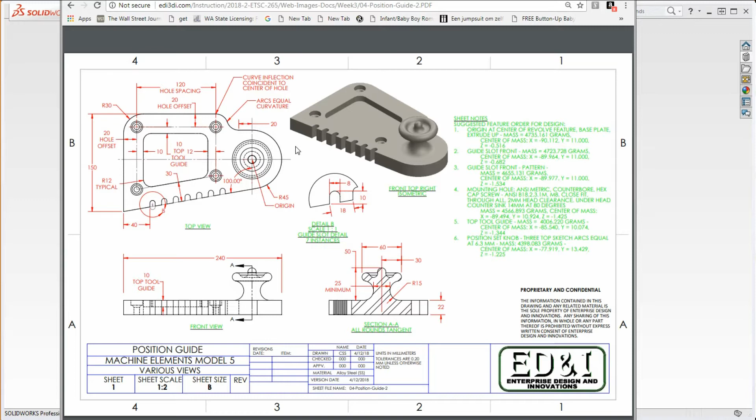The first thing you're going to do is you're going to start at that centerline, sketch an arc around here until almost to that one, not at that one, but almost to it. And you're going to stop over here and make a tangent relationship to this line, which is going to go down here at 100 degrees, and so on and so forth. So you just begin to build the model out. As we demonstrated in class too, here's going to be some other elements we're going to put in here too.

If we take a look at this view over here a little bit closer, what we want to do is we want to add some bolt hole locations in here. And the bolt hole locations are going to be off this trapezoid in here, this four-sided trapezoid, and it's going to be defined a little bit off the model too, and off of some of the sketch geometry in here too. So it also defines the sketch geometry in order to make this finish, and we'll cover that here in just a minute.

But you need to make sure, and probably the biggest thing here is this corner of that trapezoid, where that hole is going to be, is not concentric with that arc. So let's take a look at it from this direction. After we go over here with this arc, we're going to go horizontal for 20 millimeters. And we have two arcs in here that are going to be equal to each other. And then the end point of this arc is going to be coincident with this line, but the center of that arc is not going to be at the end point of that line.

So that's a mistake that some people were making in class, and I'll demonstrate this here in a bit, that you don't get a coincident relationship in there, as you probably should, and I'm going to show you how to avoid that trap and what to look for too, because a lot of people got this wrong initially, kind of bogged down in class by it. Let me show you a way to get around that, and your model works.

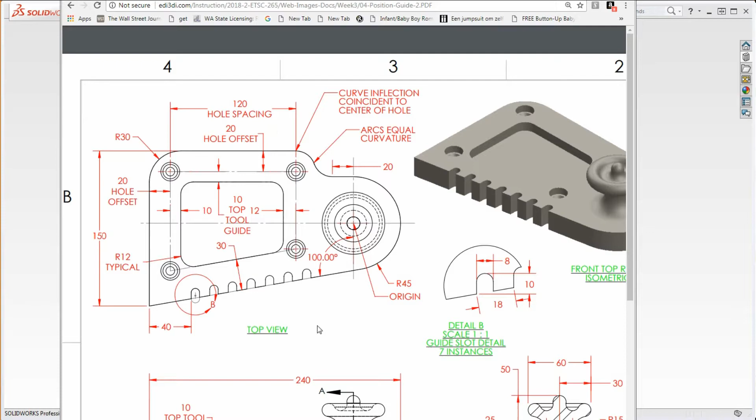For instance, Lathan's model, I changed that, got rid of this arc up here, reestablished that arc after moving some of these items around, and put back in the dimensions and that arc, and everything worked out just fine. So that's how you solve that. So that's what we're doing here. So that's going to be our first view. That's going to be our, you might say, our base feature.

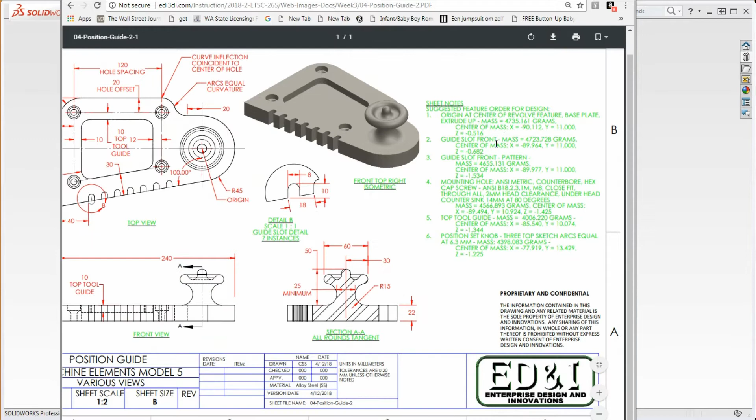Remember, the base feature is in here to ensure that we have something to put all these other features into. So the base feature is going to be this shape that we see here on the top view. We're going to go ahead and put in those slots. So as we go through here with our sheet notes, we want to start with that base feature, of course, as we've been talking about.

But you also want to put in the guide slot here in the front. We're going to do that first, and we're going to do the guide slot with the pattern after that. So we're going to do that outside of the base feature. We're not going to put that into the base feature sketch. We're going to keep that out and define that a little bit later.

So after that, we're going to put in our mounting holes. So our mounting holes are going to be these four holes in here. And we're going to put that at the very end, and that sketch geometry that we see here, we're going to show that sketch geometry as we put this together. We're going to put our mounting holes at the very end of that.

So you've got to be careful about this mounting hole, because we're going to have the center of that arc up here too, which is going to be really close to that. And you want to make sure that when you put in the mounting holes, you don't click on that and not the edge of the bolt pattern that we see.

And then after that, we're going to put in our top tool guide. Again, we're going to incorporate that as a sketch in our original base sketch, but we're going to use that in a different way. We're going to borrow that geometry using convert entities on that in order to put that together. I'll show you how to do that too.

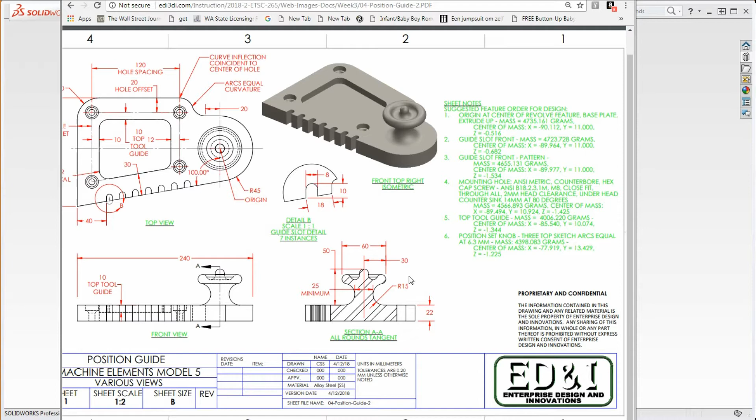And then our position set knob. It's just this image down here. It's going to be right at the origin. We're just going to go ahead and sketch a center line up, put in these arcs over here. There's no straight lines. It's just arcs. All the arcs are going to be tangent with these dimensions on it, so it actually comes together pretty quick and easy. And then that'll finish our model.

Okay, so let's get started. We're going to start from the top of our feature manager tree and define it all the way down. So the first thing we need to do is define our materials, which is going to be alloy steel bracket SS. And we're going to go ahead and apply that. And then we're going to go to the top plane and begin to sketch this out. Again, we're going to start with the origin in here, go with that arc, and then go ahead and sketch that after that. So let's do this.

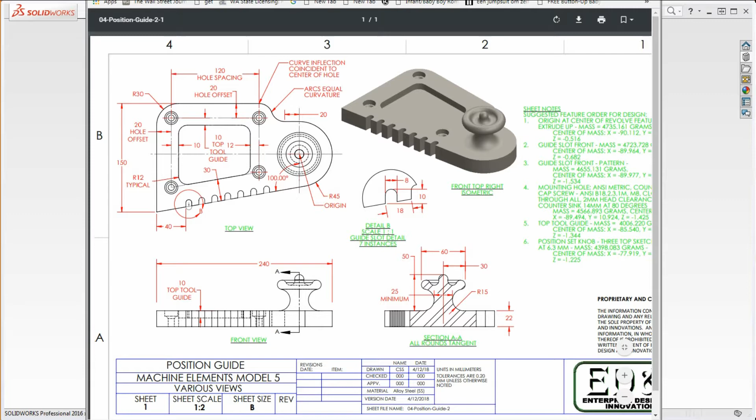You want to open up your template file, your pseudo template file. I'm going to go to new because I have the template files already associated with SolidWorks. I'm going to go to millimeter gram second on that. Go to our materials, right click on that. We're going to go to edit materials. It's going to open us up in the steel folder. We're looking for alloy steel, bracket SS. Go to apply and close.

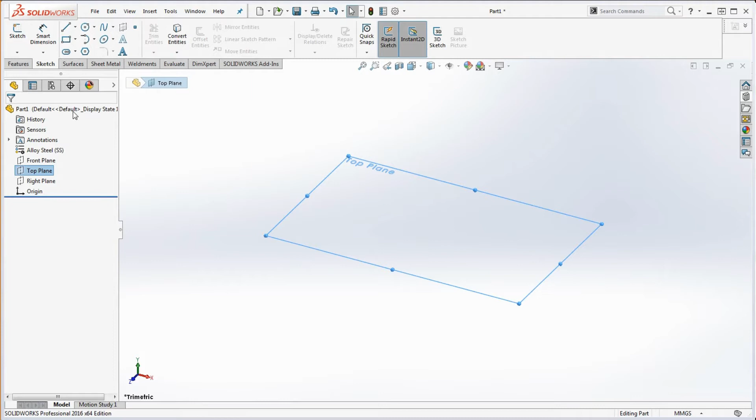We're going to go to the top plane, go to sketch. And remember, we're going to put our center lines in the origin. So we go up here to center line. We're going to take this one. We're going to pick up that witness line that goes out, kind of put that in there. This witness line, we're going to put this one in there too. And they should be black because we're going to pick up both the horizontal and vertical relationship in there. You want to make sure you do that. If they're not black right now, make those black by applying that relationship.

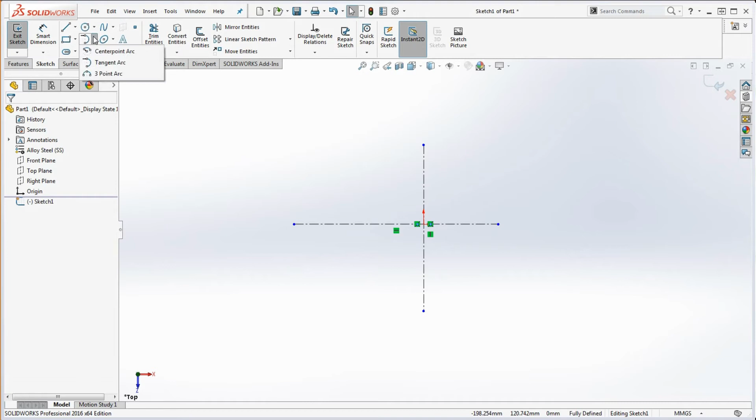So we're going to go up here to 3-point arc. We're going to start up here at this line, kind of sketch that around and bring that down over here. And then we're going to pull that out a little bit. You want to make sure that the center of that arc, which is this point over here, let's go ahead and drag that to the origin. And if it's not picking up that coincident relationship, just kind of force it. With the control key pressed, let's go ahead and press on those two elements and put that into place.

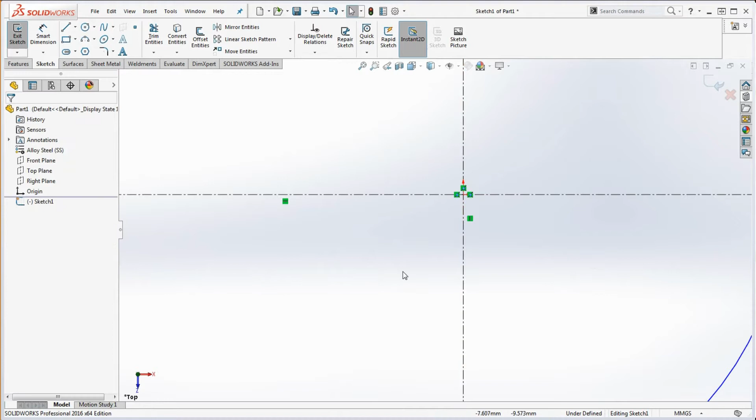This one's going to be 45. 45 millimeters, so it's black. Black point up here, blue point down here, so now we can put that line in place. So we're going to go ahead and put a line between that, and we're going to exaggerate this a little bit. But we want to make sure we get a tangent relationship in here, and that'll make this line still blue.

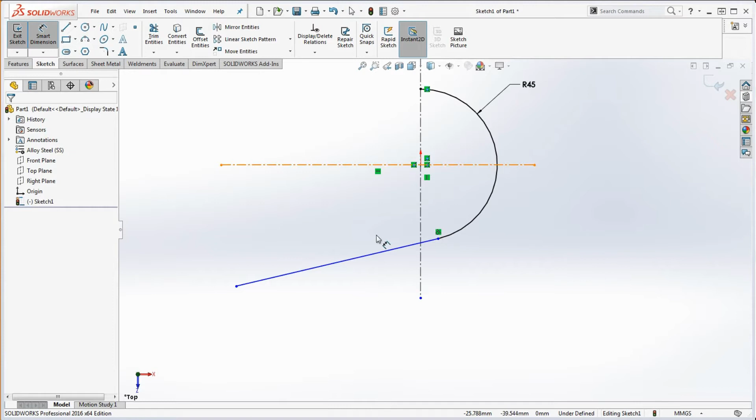But once we put in this dimension, that 100-degree dimension in there, between this line and the vertical center line, we're going to make that 100. Now we have a blue endpoint down here. So let's continue building this off in that direction. So we're going to pull that over here, and then we're going to take a line, and we're going to go vertical from that line. We're going to pull that up.

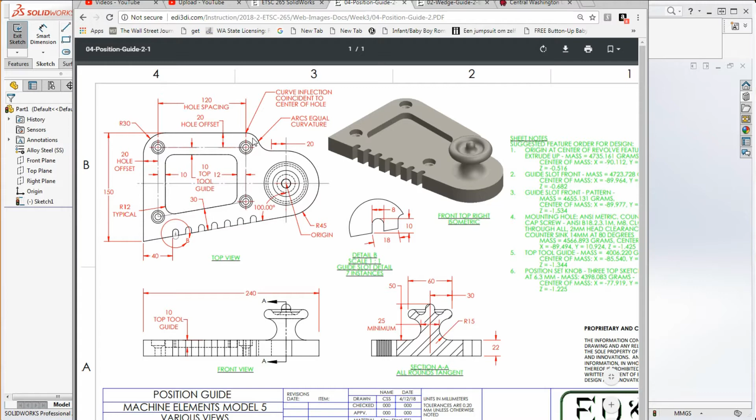Instead of me telling you what the dimensions are going to be, let's go ahead and take a look at our drawing over here. So we have this arc in here, we have that line in here, we went over here. We need to find a distance dimension, which is going to be 240 millimeters from that arc over here to that line over here. So let's go ahead and put that in, and we can go ahead and finish building this. We're going to avoid these two curves in here just to be safe. We're going to do that last.

So now we're going to put in a dimension in here. Now when you're dimensioning, if you hold the shift key and click on that and then click on this line, that's a big time saver. Now we can put in 240 millimeters in that. Why the shift key? Shift key is going to automatically give us that maximum condition when we click on that arc. Instead of selecting the center of that arc, it's selecting that edge with the shift key, and it will give you that 240 millimeter dimension.

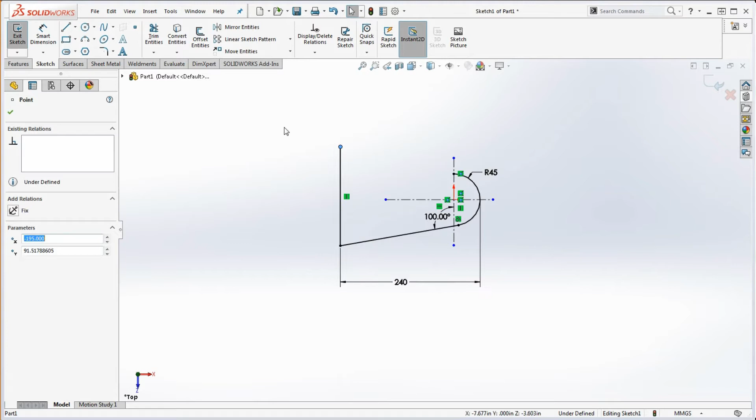So let's go over here and put a line across the top. This line is going to be 150 millimeters. We're not going to put that arc in there yet, but what we want to do is we want to click on that line and that point over here. We're going to make that 150 millimeters. By doing that and then putting the fillet in there, we get that virtual sharp. And that was a video I put up on the website over the weekend.

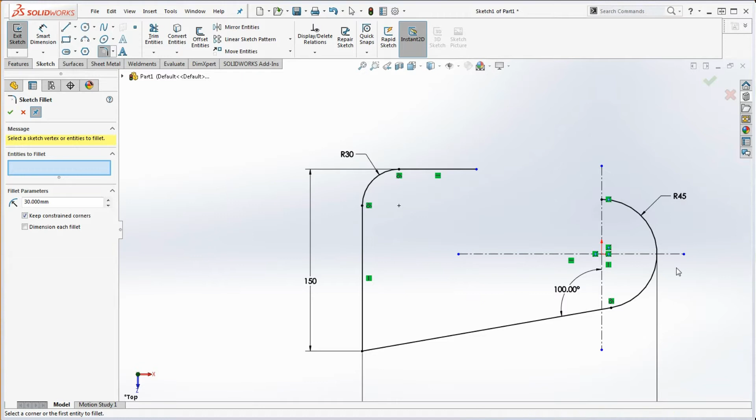So now we're going to put in that fillet. We're going to make that 30 millimeters. We're going to go ahead and click on that edge over here, right click on that line. So now everything's black and fully defined as we go, except for the end point of that line. So now we don't know where the end point of that line is going to be. That's going to be referencing this bolt hole pattern we have in here and that trapezoid.

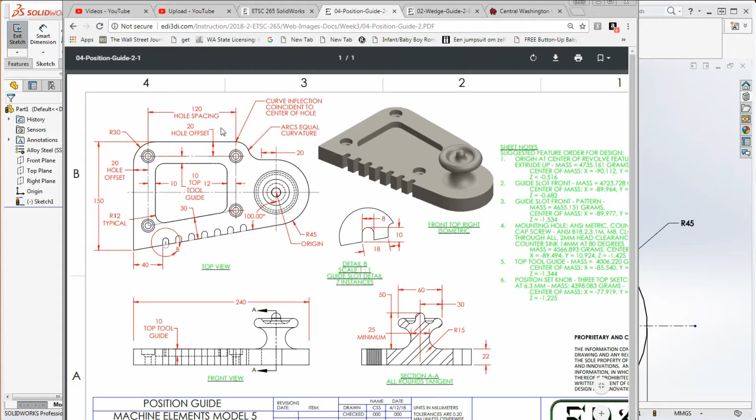So let's go ahead and put that trapezoid in. So think about that. It's 20 millimeters off the top, 20 millimeters off the side, 30 millimeters off the bottom. Remember, we've got to make this line parallel to that line down here. And then it's going to be 12 millimeters off this side. That's actually going to define the inside tool guide. So we're not going to do that yet, but we are going to put all the other elements in there, and then we're going to dimension it for 120 millimeters. So 20 top, 20 side, 30 bottom.

So let's do that. Let's put in our trapezoid. We're going to use center lines for this. Just kind of go up. Make sure you don't pick up your relationships in here. Notice that when you put in that line, we have that witness line over here to that. Don't want to do that. You want to kind of avoid any sort of relationships that might develop in there. So we're going to do something like this. And this one we're going to go ahead and put that in there.

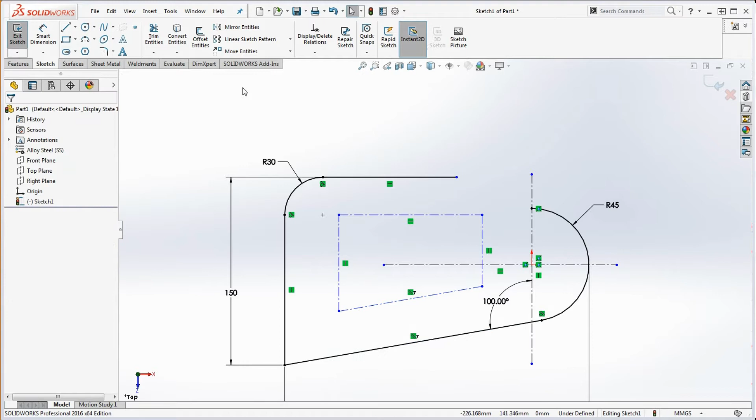And now we want to take this line and this line. We're going to make that parallel. You can't put a distance dimension in there unless you make them parallel, or otherwise it's going to be an angle. We're going to make that 30. This one's going to be 20. And the top one's going to be 20. And then this one's going to be 120.

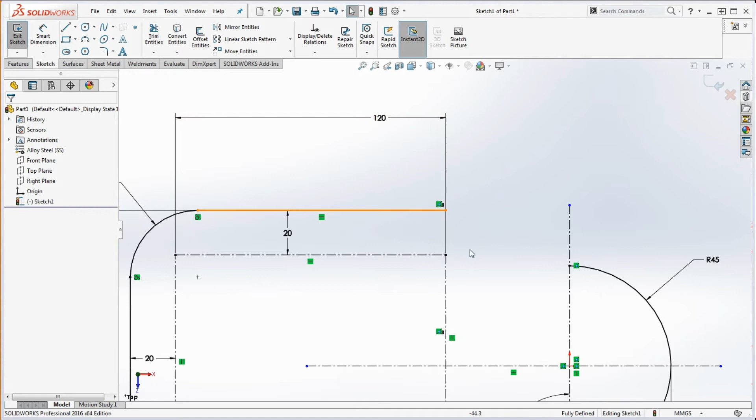So now that we have that defined over here with that 120 millimeter dimension, now we can take the end point of that line over here, and that vertical center line that we have, we're going to make that coincident, or collinear is really what it should be. It's not right on it, but it is collinear to it. So now we could just put in our last two items in here. The last two items are going to be these two arcs.

We're going to take a line in here, make that 20 millimeters across, and we're going to put in two arcs which are going to have equal radiuses. So this line over here, let's sketch that out and put a dimension on it to make sure we get it fully defined before we move further. We'll make that 20.

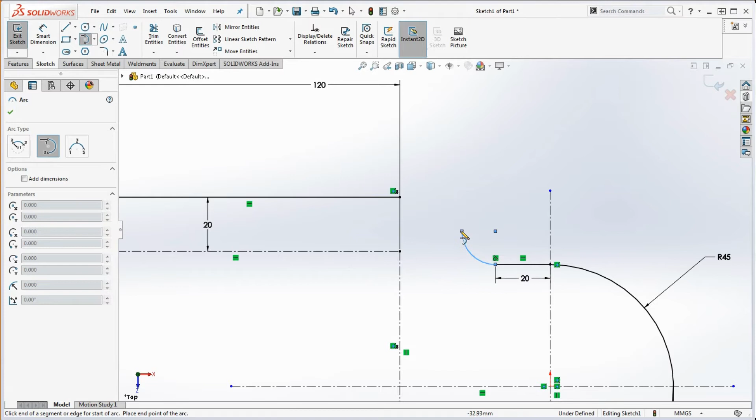Now we're going to put in a couple tangent arcs. We'll put a tangent arc in here, and another one in here. Let's get our tangency, selecting that with the control key, and make sure those two are tangent. And let's take these two arcs and make those equal to each other. Okay, so there we have it.

One thing to note here, and this was a problem before: the center of that arc, if you click on it, is this point right here. This point is not shared by that point. It's a little different because we have that 20 millimeter dimension. So if you didn't put this dimension in yet, and you have that arc in place, and somehow you made a mistake and made those merge together, you'd think you'd have a coincident relationship down here, but you don't. It's completely hidden - you don't know what's going on, but I guarantee you won't get the right mass properties.

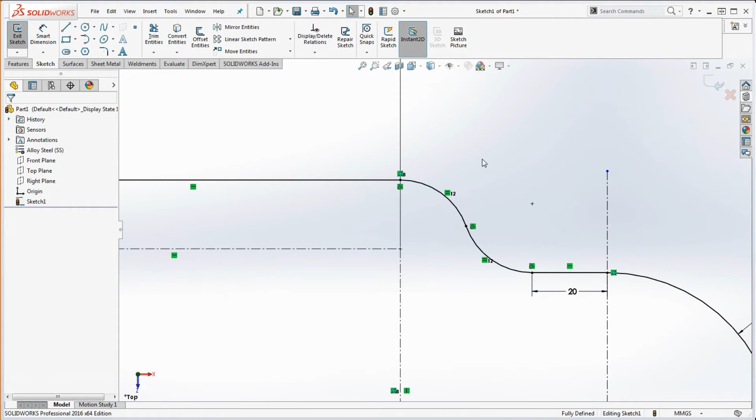If you click on this line and that line and put a dimension in there, it's going to be driven, but it's not a 20 millimeter dimension. So if you're having something like that, what do you do? It's hard to disconnect that. The easiest thing to do is just take that arc and make it disappear. Pull that down a little bit, make sure you don't get that interference again, and try that tangent arc again, putting it into place.

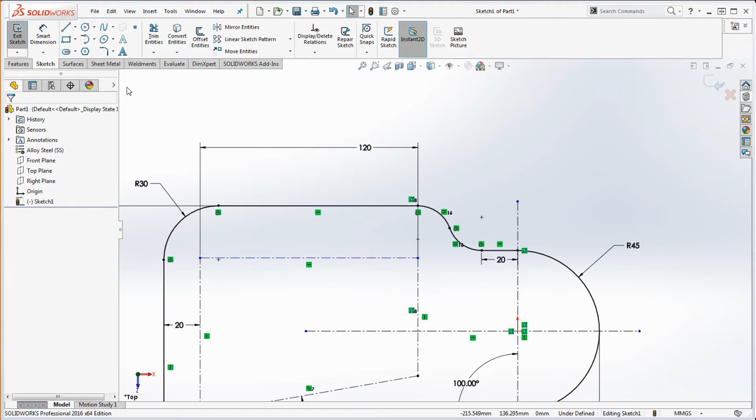So we have a tangent here, a tangent there. If we make both of these equal to each other again, bang, you get it. Let's put in that 20 millimeter dimension, and that should make that correct. So we're going to make that 20, and now we have that in place.

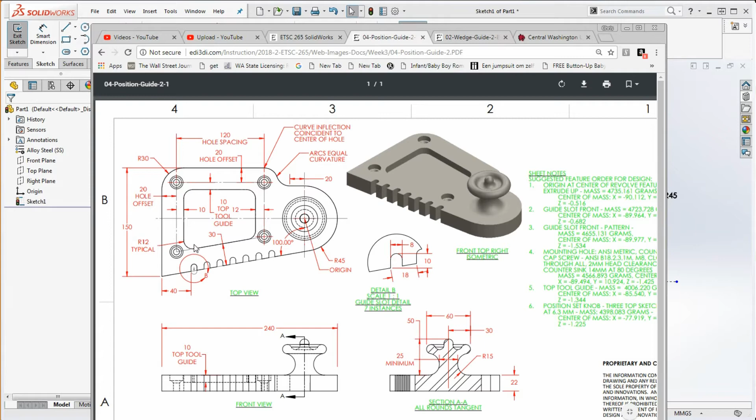So we could put in that tool guide in here - might as well do that. Let's go ahead and put that in. That's going to be 10 millimeters off the top and the side. Off to the right, it's going to be 12, and it's going to be collinear on the bottom. So let's go ahead and do that. And then the arc down here, the fillet radius, is going to be 12 millimeters. Let's go ahead and put that in.

So we're going to start with a line, starting over here, and sketch that up. We could do this with the sketch fillet, or we could just take that arc command and put that over here. Go back to the arc by taking that line to where it started, bring that down over here, and do the same thing over here. Maybe bring that down, straight line across the bottom, and then again take that arc and bring it up here.

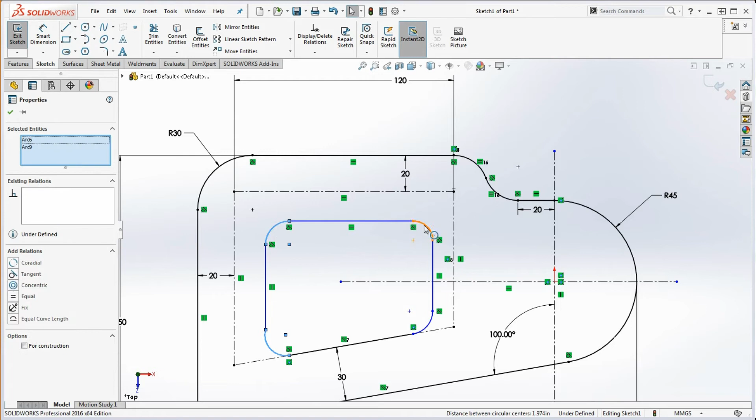We're going to make all these arcs equal to each other, so you can collect all those together and make them equal. We could define one of those, and while we're here, let's put a tangent relationship in and make sure they're all tangent. Now, another way of doing this - I'm not going to show every way we could do this - but we could have just taken lines and put those in there with this line being collinear down here, then put a fillet radius on that. That would have worked.

But now that we have that in place, let's go ahead and put a dimension on that - that's going to be 12. Then this offset is going to be 10. So as we begin to put this into place, it's going to get black, becoming fully defined, or more fully defined. That's going to be 10, and then this one over here is going to be 20.

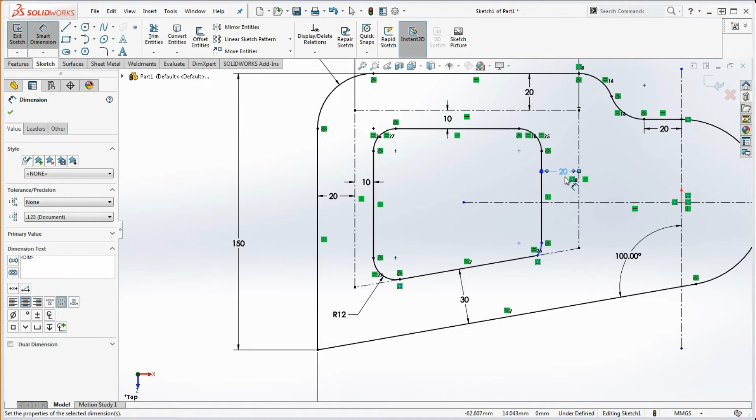And when we do that, put that 20 millimeter dimension in there, everything's black and fully defined except for this guy. We didn't catch that earlier - we're going to make sure that that arc and that line are going to be tangent to each other.

Okay, now we have everything in place. We need to extrude this. For our base extrude, we're going to use our base sketch for our base extrude. It's going to be 22 millimeters. We can see that off of our section AA.

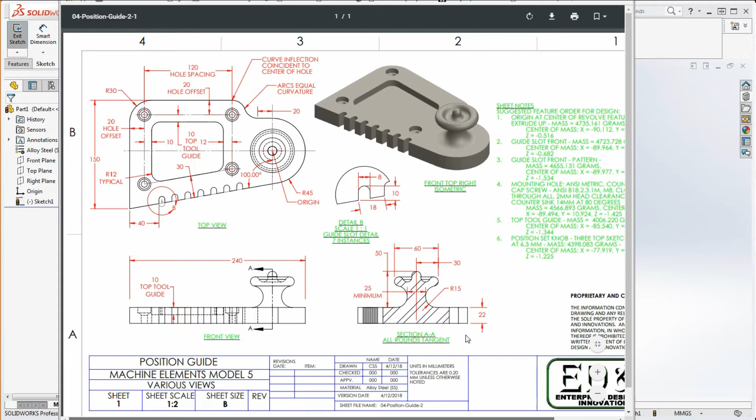Let's go ahead and update this. Yeah, that's a little bit better. That shows the position of the position knob detail in here. We'll cover that in a little bit.

I made some updates to the drawing that weren't reflected in that drawing we were looking at. So 22 millimeters is going to be the value of that extrude.

So we're going to go to Features, Extruded Boss Base. We're going to go to Midplane, right? Is that what it says over here? Let's go ahead and read that to make sure. Origin at center, Revolve Feature, Base Plate, Extrude Up. I'm going to make sure we extrude up. So it's not going to be midplane. It's going to be blind. You want to make sure you extrude up.

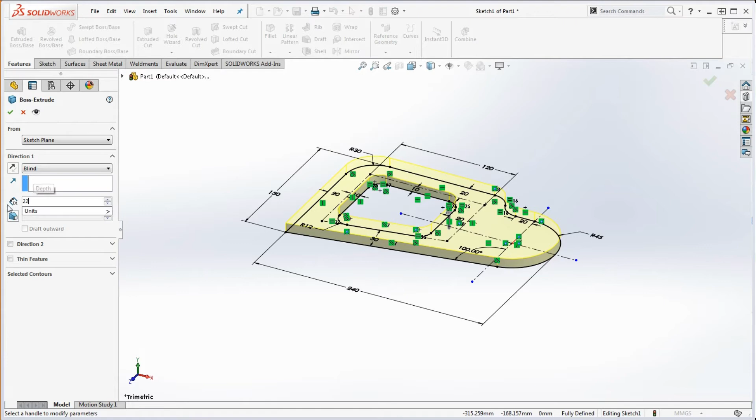We're going to make sure we do that at 22 millimeters and select the contours. We don't want that hole in the middle, we don't want that donut. We want to go ahead and click on this contour. It's going to include everything that's on the inside of that.

Now if we go to the green check mark, here's a moment of truth. Let's make sure we get this correct. Let's go to Evaluate, Mass Properties, and make sure we have that.

So 4735.16 - I think we need one more digit in here. So let's go ahead and take our decimal places, the units after the decimal. Digits after the decimal should be 3. Take our slider and put that all the way up to the top, the highest.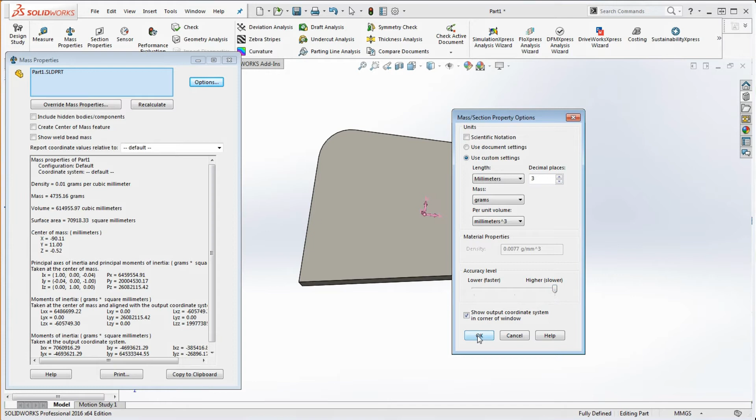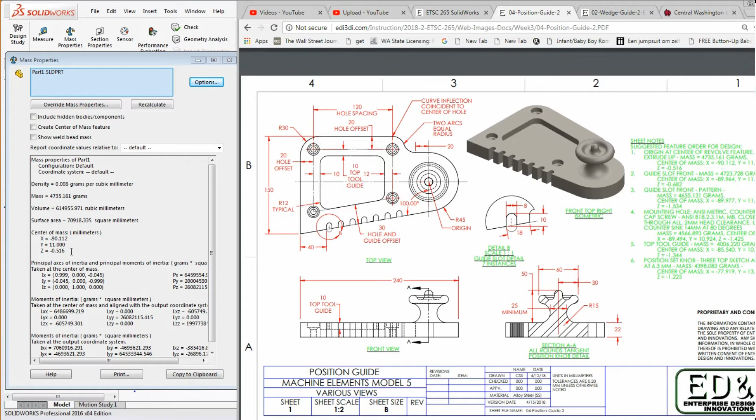And we're looking at 4735.161. Let's take a look at our drawing over here. Yep, that's what it is. What it says, 4735.161, off in the X by a negative 90.112. That's correct. Y, it's a positive 11. And Z, it's a negative 0.516, which we have. So that's what you should have for that base feature.

Okay, so let's do our guide slot in the front. That's going to be our second step in here. So if you take a look at our steps over here, what we have in our sheet notes is a suggested feature order for a design. Start with the base plate, and we're going to put in our guide slot in the front, and our guide slot pattern, of which there's going to be 7 of them.

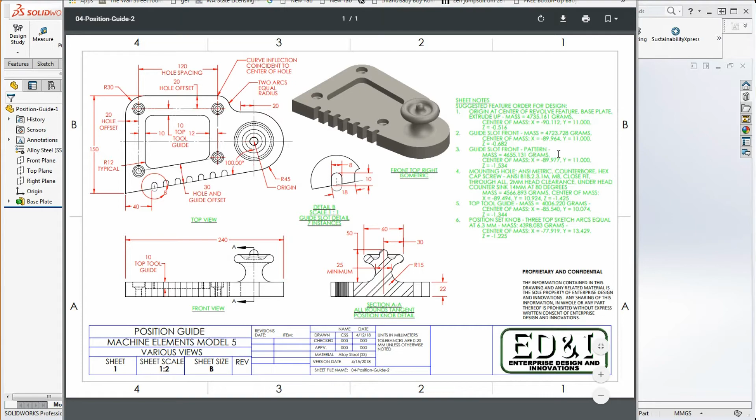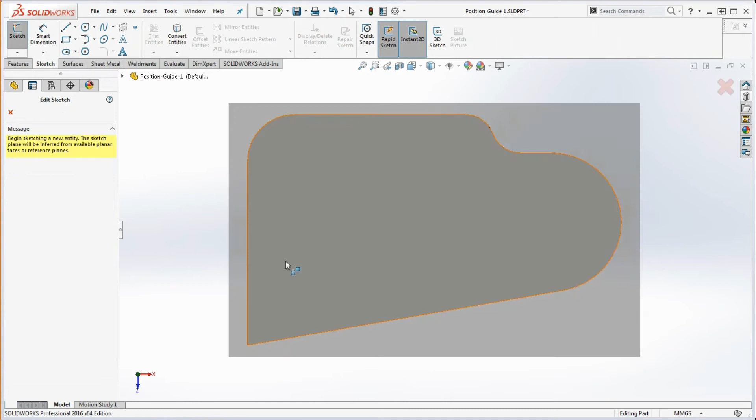So we're going to start with this top plate. We're going to go normal to that, and now we're going to put in our slot. So this is pretty simple - it might be a different application of the slot tool that you may not be familiar with. We're going to go ahead and click on that face, and we're just going to kind of exaggerate that a little bit. You want to make sure it gets vertical, and then we're going to put our dimensions in that.

So just kind of put that out there for now. We're going to make that 8 millimeters wide. And then long, if we take a look at our dimensions in here, what we're looking at is this - we have a dimension between that top arc and that point down here. So we're going to have to put that on that line down here. And then it's going to be 40 millimeters from the edge.

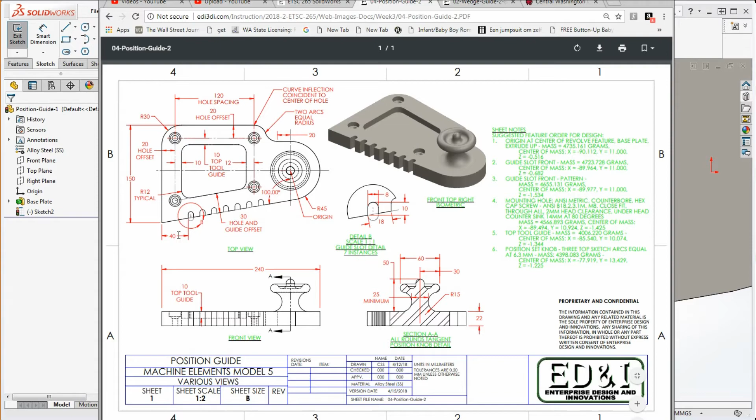So we can go ahead and define this a little bit better. So let's go ahead and do this. Let's go ahead and put this dimension in here - it's going to be 40 millimeters there. And then this point's over here. We're going to go ahead and drag that down to that edge.

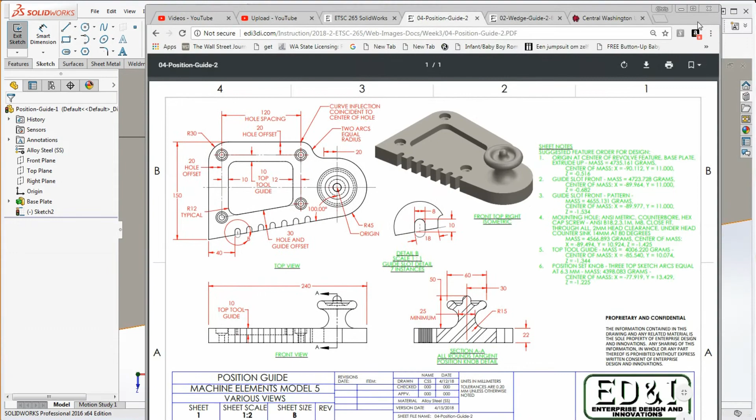Going to make a coincident relationship in there, which means the only thing we have left to define in here - we'll make that a little bit closer so we can see that - the only thing we have left to define is that dimension that goes between this point and that arc. So again, let's take a look at that. We're looking at this detail, between this point down here and the top of that arc with that 10 millimeter dimension in there.

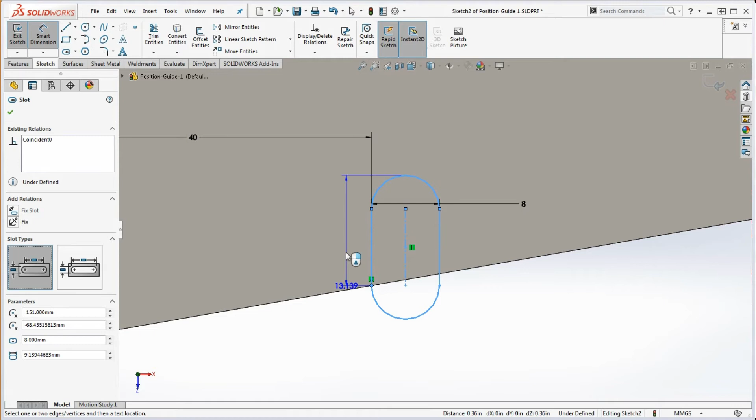The 8 millimeter width is already defined, and this 18 is going to pertain to our linear feature pattern that we're going to put in. So smart dimension, shift key between that and that will give us a maximum condition. We're going to make that 10, and now we're going to cut that.

So features, extruded cut, through all or blind, through all. Blind will just do the thickness that we have in there. And no rebuild errors. So let's take a look at this.

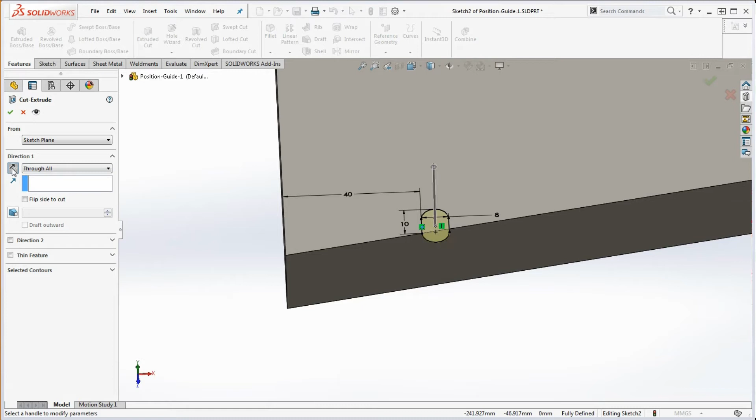It might be actually going off in the wrong direction. So if you have that error, it's not going to let you do this. Make sure you pull that off to the side, take a look at that, and reverse the direction as you need it. So I feel pretty confident about that.

So we're going to make that linear pattern in here next, and then we'll take our mass properties. So linear pattern, direction is going to be on this edge or that edge, whichever you want to choose.

You want to make sure that the offset is going to be 18 millimeters along that edge. So remember, we're going along that edge, and it's going to start the cycle here at that point, or that edge over here, and it's going to end at that edge. So that's going to be the cycle. So between edge to edge, when one starts, and you have that blank spot in the middle, and then the next one starts right after that.

So spacing and instances, well, the spacing is going to be 18 millimeters, and I think we're doing 7, so I think that'll work out. We don't want to do direction 2. Features and faces, instead of going to the feature flyout, we could just click on the face, and that would be specific to that feature.

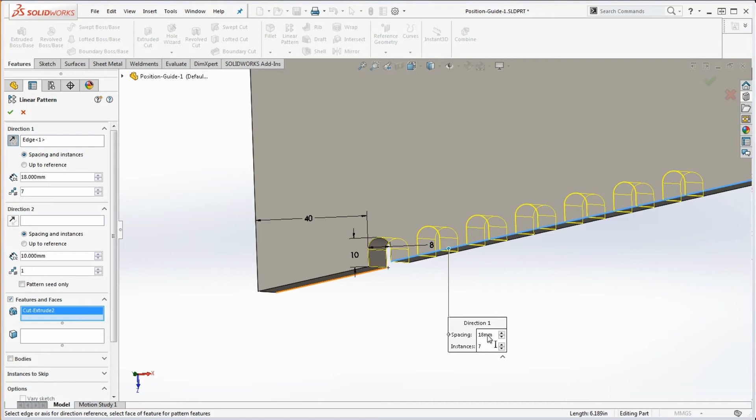And here's your units down here too if you want to change anything. But if we go to the green check mark, bang, now we have that in place. So let's go ahead and check our mass properties.

So again, up to evaluate mass properties, let's take a look at that. 4655.131. Let's see if that matches up to what we're looking for here. The center of mass should be negative 89.977 on X, 11 on the Y, and negative 1.534 on the Z.

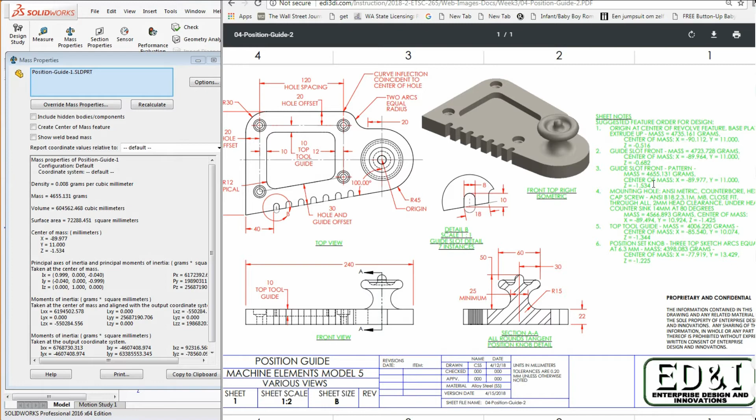So that's pretty easy, but it's easy once you get this all together, once you understand how to put that slot tool in place, how to get that lined up, looking at the geometry, how to do the pattern, referencing that edge. Then it's easy once you understand this stuff. But for a lot of you, this might be the first time you see something like this, but every time you see something like this, you kind of remember it, and you're going to be able to apply that later in other projects and even in your own final design project.

Okie doke, so what else have we got? If we take a look at our drawing again, let's refer back to this. What we're looking for over here is a mounting hole.

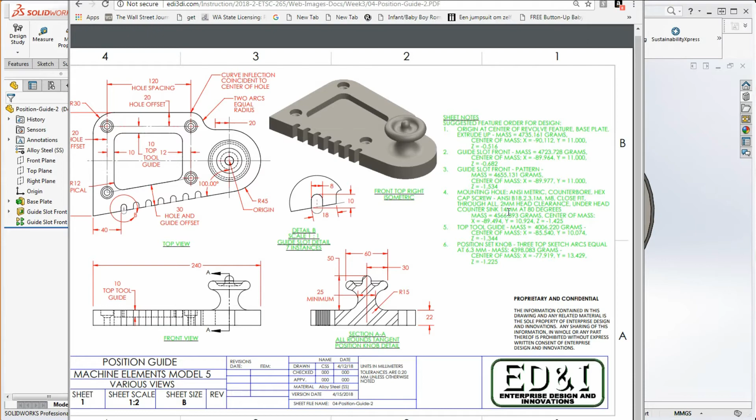We're going to start with an ANSI metric counterbore hex cap screw, ANSI B18 2.3.1M. Size is going to be 8 millimeters, close fit. Now we have a couple extra items in here too. We're going to make that through all, but we're also going to give ourselves a 2 millimeter head clearance, and then we're going to do an underhead countersink of 14 millimeters wide at 80 degrees.

So let's do that. If we go to features, we're going to go right to the hole wizard. Don't need a sketch for this, not right away, we're going to put in points later. But we also want to make sure that we see that sketch in the background for our base plate, so we're going to right click on that in our feature flyout, and we're going to show that.

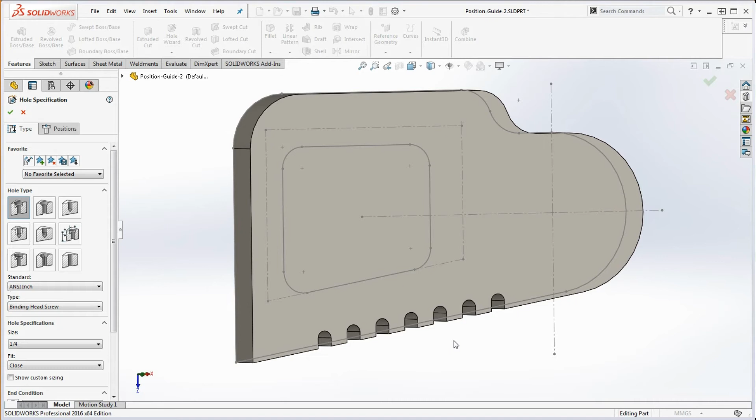So we're going to be choosing that point, this point over here, not the center of the arc over there, that point and this point when we put this together. And you also want to make sure that you're normal to that surface, and we're going to go normal to that so we can actually select those.

So let's do this. ANSI inch, no, we're going to do ANSI metric. We're not going to do hex bolt, we're going to do hex cap screw, I believe. Let's go ahead and read that: counterbore hex cap screw, ANSI B18 2.3.1M.

So ANSI B18.2.3.1M, and then the size is going to be M8, 8 millimeters. Fit's going to be close, so we got that. So end condition is going to be through all. Now we're going to do a head clearance in here, I believe. If we take a look at this, there's going to be a 2 millimeter head clearance. So let's go ahead and put in 2 for that.

And then we're going to have an under head countersink. So under the head of our screw, we're going to have a little bit of a kind of a chamfer in there. We're going to put a countersink in there. And that countersink is going to be 14 millimeters. So we're going to make that 14. And it's going to be 80 degrees rather than 90 degrees. So you want to make sure you get all those parameters in there.

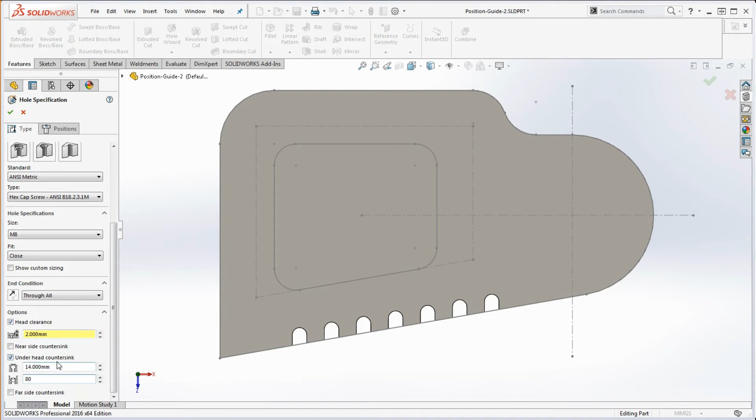Once we do that, let's go to positions. You want to click on this face. Don't try to click on these points yet. Click on the face. Don't do 3D sketch. And now you can begin dropping points. So that point here, make sure you're not doing the arc. If you don't see that point in here for the arc, you got that wrong. Go back to the base feature and rewind to the beginning of this video.

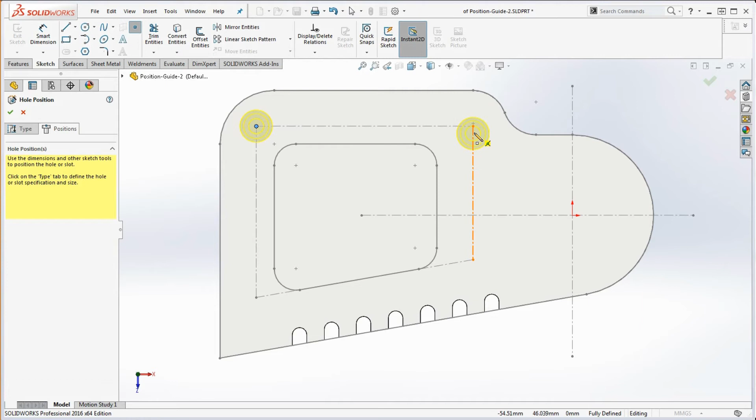We're going to click on this point here, that point here, this point here, and then go to the green check mark here or over here in the right-hand corner or right-click on your mouse, and now we should have that in place. So let's go ahead and take our mass properties, make sure we get that in place. This is an easy place to make an error because there are a lot of options in here. But let's go ahead and take a look at this.

So when we get down with this, it should be 4566.893 grams, and then the negative 89.494, which is what we have. Y is going to be 10.924, and then Z is going to be a negative 1.425, which we have.

Again, I make it look easy, but once you begin to understand how all this stuff comes together, you're going to be really fast by the end of the quarter when you're beginning to work a little bit more seriously on your final design projects.

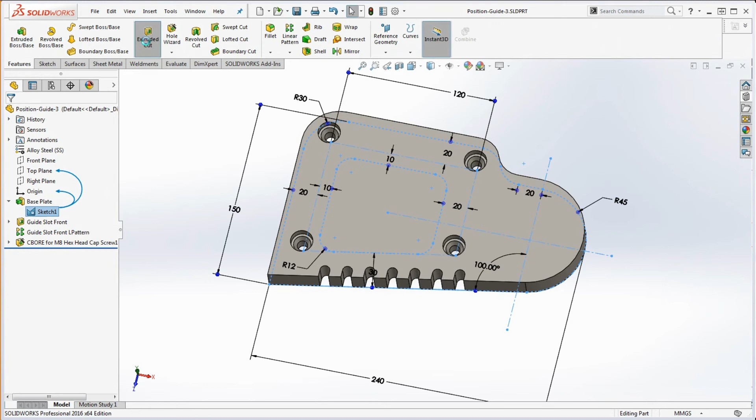Okay, so the top tool guide. What we need to do is we need to make a cut on the top face, part of the way into our base feature in here, in order to put that in place. So what some of the students did is they actually took that sketch, right-clicked on it, and borrowed that sketch. So what they did is they borrowed that sketch, went up here to features, went to extruded cut, and then they chose the contour in that.

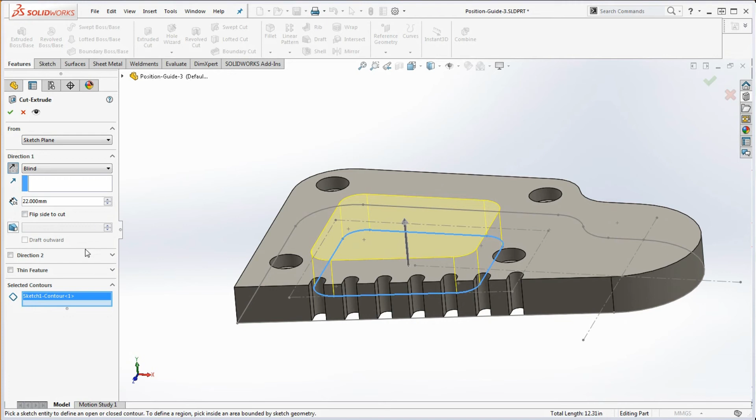If we went to selected contours, we don't want to do the whole sketch, so we're going to clear that. But we want to go ahead and select on this. It's going to cut all the way through from the bottom. If you go this direction on that, it's going to cut all the way through the top. But what we really want to do is we want to start from that surface and cut all the way down. So one way to do that is just go from surface, face, or plane and click on this guide to do that. So now you can see it's going to go off in the wrong direction.

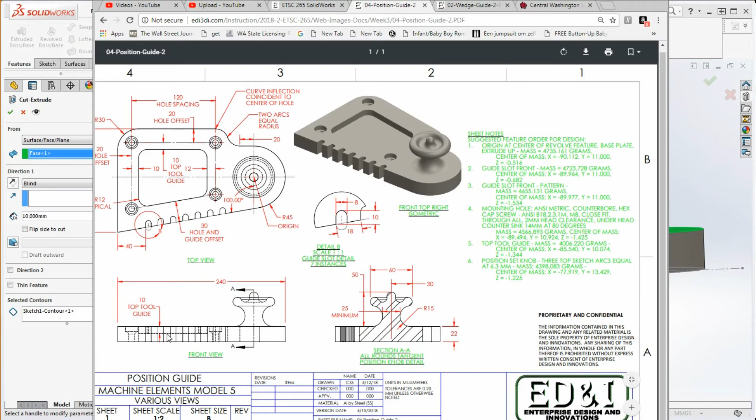Then we can go ahead and reverse that. And this time we're going to make that 10 millimeters. So that is one way to do that. And what we're trying to do is we're trying to emulate this, so it makes that cut in here using the sketch geometry that we already have in place of our base sketch. And right down here in our front view, that's our top tool guide. We want to make sure that goes down by 10 millimeters. So that's one way to do it.

Let's escape out of that, or do the red X. We could do this a different way. We're going to go ahead and choose that sketch. We're going to go to sketch up here. And if we go to convert entities, like right now, it's going to go ahead and convert all the edges in here, which we probably don't want to do. So in order to get to convert entities, even though it's showing, you still have to go over here to the sketch button to click on it.

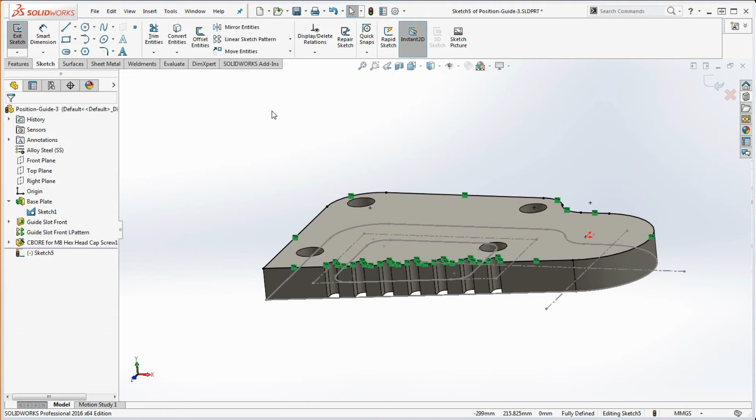But if we go to convert entities, it's going to convert all those edges and stuff like that, which we really don't want to do. So let's do this. We'll back up just one step. Before we go to convert entities, since we already have that face selected, just take your cursor and select out here. It'll unselect it if you do that.

And then we can go to convert entities, and you want to make sure that, if you go to the Properties Manager, you select the chain. We're going to go ahead and click on that arc or that line. It's going to select all of that, and go to the green check mark. And now we have that in place. It's borrowing the geometry off that sketch in the bottom, our base sketch.

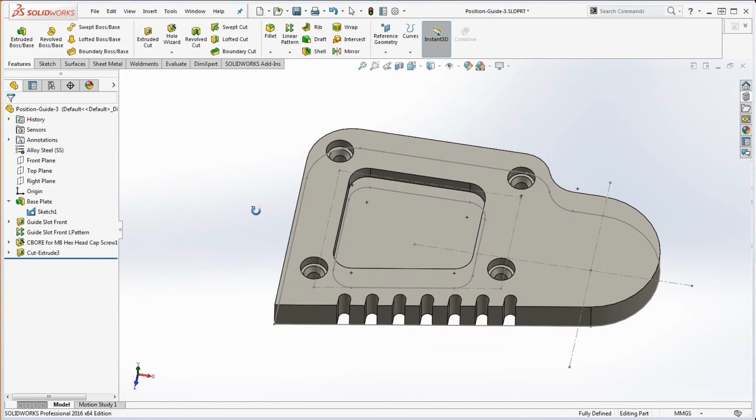If we go to Features, Extruded Cut, we're going to go down by 10 millimeters again. It's yet another way of doing it. If we go to the green check mark, bang, now we have our top tool guide feature in place. So let's go back to Evaluate, Mass Properties; that always tells us if we've done the job correctly.

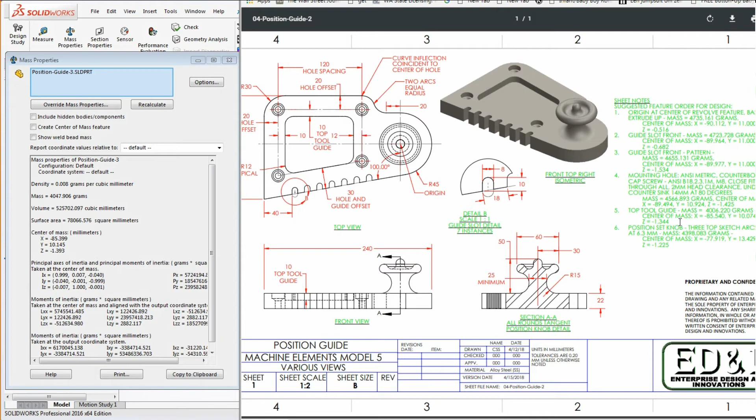So now we're looking at a mass of 4047.906, and that ain't right. It doesn't show that we have that correct. So let's think about this a moment. So that's a top tool guide. Let's just try that one more time. 4047.906. Maybe I don't have that in place. Well, I made an error. So let's go into our base sketch and see what error we made.

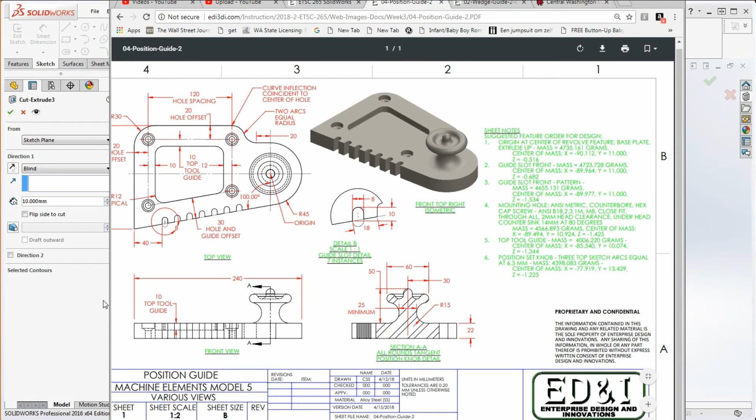Okay, so let's check some of the values that help define this. We want to make sure that we're going down by 10 millimeters, which we are, and that's what it says in the drawing if you take a look at the front view. So let's check the dimensions in our sketch. Again, the nice thing about these mass properties values is that it shows you right away that you made a mistake, and now you need to go back and fix that mistake before you go further.

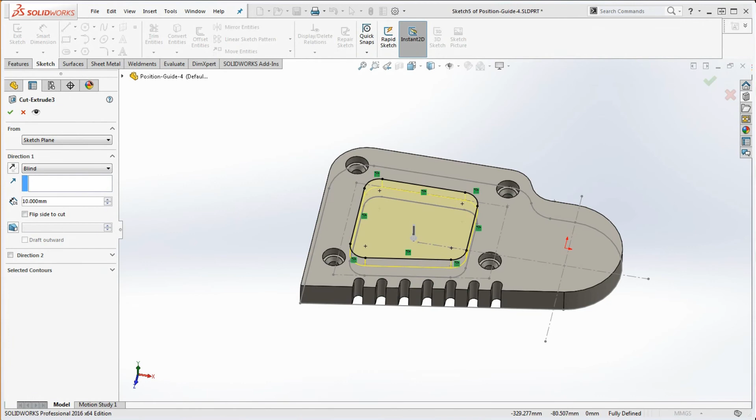So we want to make sure we have a 10 by 10 by 12 millimeter offset over here, and it's got to be collinear with this line, which is defined by that 30 millimeter dimension. So let's make sure we have that correct. We're going to go to the green check mark, go to our base sketch, and make sure we have that in place. That should be 10, that should be 10, that should be 30, and this is 20.

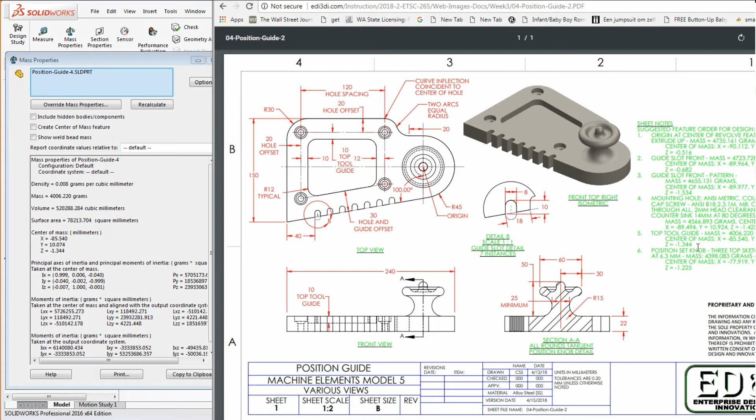So remember, we put the sketch in our base feature, but it didn't affect us until now, because we hadn't really used it until now. Now that we've used it, it's going to affect us. So let's go back to mass properties and see if we got that fixed. It looks like we did: 4006.220, and negative 85.540 on the X. That's correct. Y is going to be 10.074, and Z is going to be negative 1.344, which we have.

So that gives you an opportunity when you see a mistake like that, especially in a step-by-step approach like this with mass properties. Now you know what you need to do and exactly where to look when something goes wrong with your model.

Okay, so our last feature is going to be our position knob. This is the detail we have on it. It's essentially the section view of our front view, right along the right plane. So we're going to choose the right plane for this, and then put in these details. We're going to start with this arc in the bottom. We're going to have a tangent and coincident relationship with that edge on the bottom base feature.

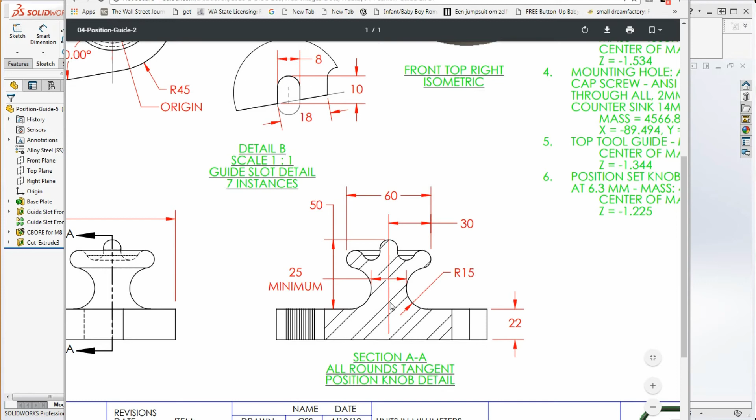And we're going to have a radius of 15 millimeters on that, and a 25 millimeter offset from that center line, so we're going to put that in. That should give us a black arc in here, a black model entity. And the only thing that needs to be defined after that is going to be the endpoint of that.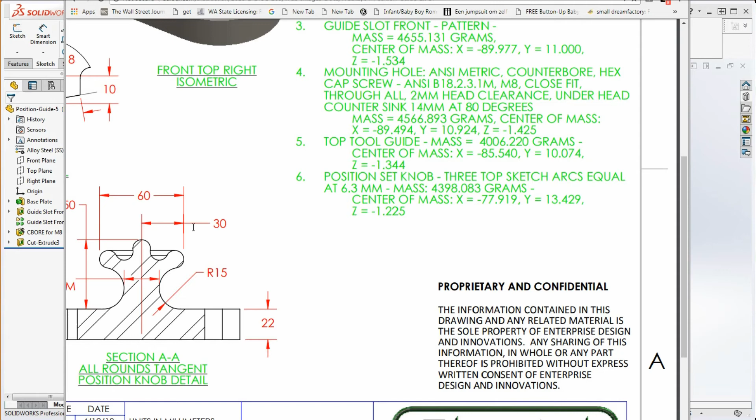We're going to put in 3 equal arcs in here after that of 6.3 millimeters. So if we take a look at this and read this a little bit, 3 top sketch arcs are going to be equal to each other at 6.3 millimeters. And then we're going to go into the mass, so check that. So let's do that. Let's go back to our feature in here. Let's make sure we go ahead and rename that. So this last feature we put in here is going to be our tool guide, or top tool guide.

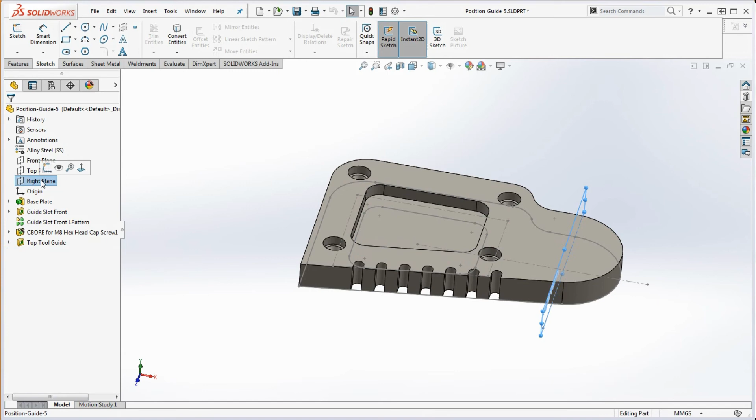And then once you do that, let's go to the right plane, let's go to sketch, and we're going to begin sketching on that. So let's go normal to that plane. And the first thing we're going to do is put in a center line from the origin. Projected origin, we're going to go ahead and move that up, give ourselves plenty of room. Let's go ahead and put in that arc. So we're going to start with a 3-point arc.

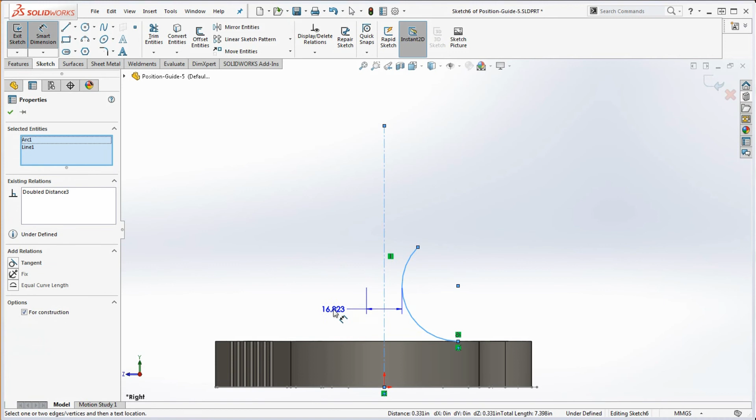A tangent arc won't work because we don't have a line in here yet, but if we put in a 3-point arc, maybe something like that, maybe swing that around now a little bit, and click on these two, that edge and that arc itself, make that tangent. And then we're going to put our minimum dimension in here. So I think if we did the shift key in there, it's going to allow us to do that. So 25 millimeters for that minimum dimension, and then this one's going to be 15. So it should give us that black line in here, that black arc. The endpoint still needs to be defined.

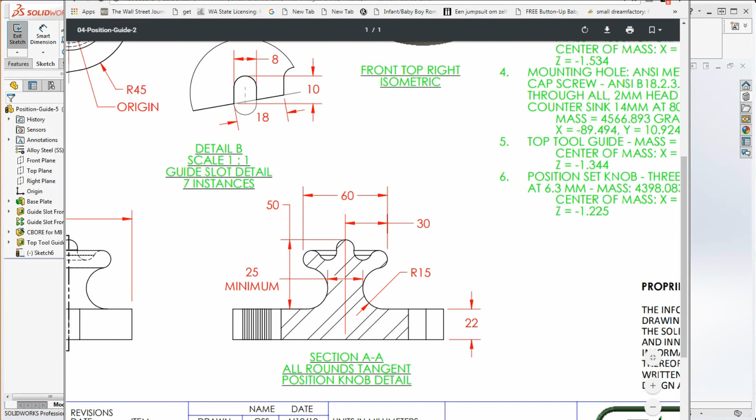So let's go ahead and maybe shorten this line down here a little bit, but let's take a look at our drawing and see what else we need to put in here. So if you click on that, we're going to go ahead and put in an arc tangent over here, another arc that's going to be tangent to that one. Try to get the basic shape that we're looking for, and then we'll put it all together. So we'll start over here. We'll put in a tangent arc this time. Kind of sketch that around the corner over here as best we can. It may not let us get too far over there. Now we're going to go in and do the same thing over here, and then one last one over here.

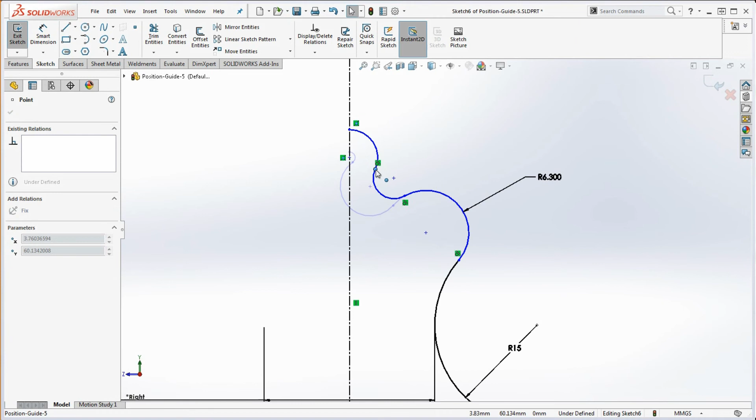To define that a little bit, we're going to take the center of that arc. We're going to put that on that center line. That way it's kind of tangent when it goes over. And we're going to put in one dimension on this. We're going to just dimension this one. It's going to be 6.3. And kind of bring these back a little bit, trying to get the form that we're looking at, and try to approximate these to be of similar size.

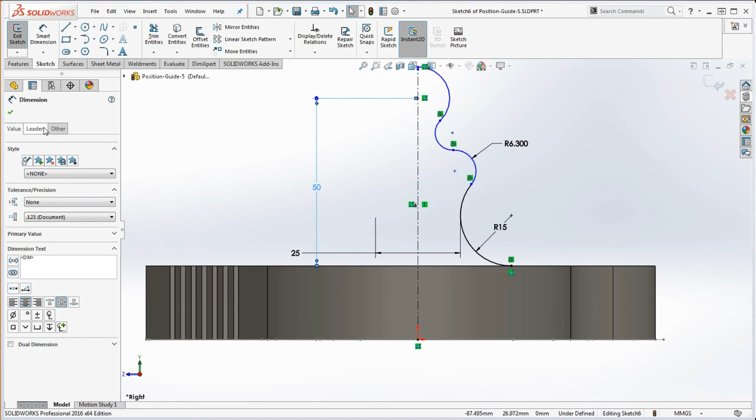And let's go ahead and put in our top dimension up here too. It's going to be 50 millimeters from this arc up here to the bottom down here. So we're going to make that 50. Probably you should have used a shift key to select that. But we're going to go ahead and select that line, go to leaders. That leader line, we're going to make that our maximum condition. Again, we're going to bring that down to 50.

Desire is to put in some dimensions in here so this model doesn't blow up on us when we finally get this all together. We also want to have that dimension in here too that's going to go between that arc over here with the shift key. Let's try that again. So enter is going to get us back to that tool. Shift key is going to select that edge, and we're going to go ahead and select this. And we're going to make that 60 going across. So that kind of looks a little bit better. And now we're going to make all three of these equal to each other. Okay, so that looks about right.

But let me show you something. We're going to put in a dimension between this point and this point. It's going to be a driven dimension. So we're going to make that driven, and we're going to go to OK. But let me show you something that just actually might happen to you, and it happened to me. This is supposed to be the correct dimension in here in order to get the right mass properties. But what we want to do is, just for demonstration, we're going to right-click on this.

We're going to make that a driven dimension. And now we're going to take this in here. We're going to take this point of that arc. I'm going to move that forward a little bit. You notice that it moves dramatically over here from that point up here to that point. It doesn't move a lot over here.

And if we were to take that dimension, right-click on that dimension, go back and make it driving, and type in 60 in here. What used to be 11.263 dimension in here is now 10.322. So in other words, what's happening here with the model geometry we have in here, it's resolving in two different ways with the same dimensions and the same relationships in here.

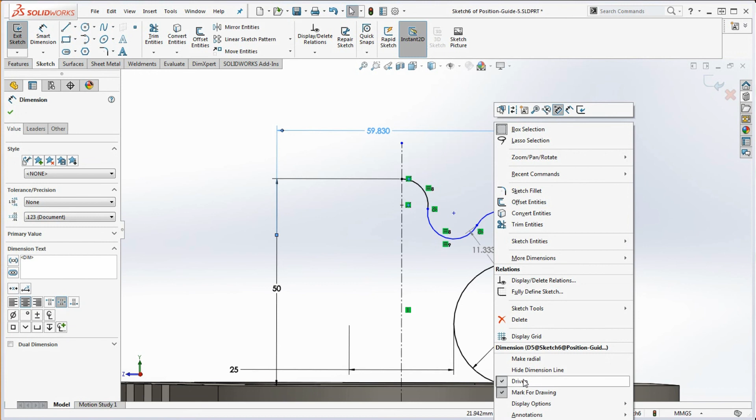We're going to take that dimension again, right-click on that. We're going to make that driving, and then we're going to type in the value that it should be, 60. And now we're going to get back to that 11.263 dimension. Kind of odd. But in a way, we have geometry in here that could be solved two different ways, the way we have sketched it up. So make sure, if you didn't get this correct, dimension between these 2 points, make sure you get the value of 11.263. If you're not getting it, it's the 10.322, which I think is what it was before.

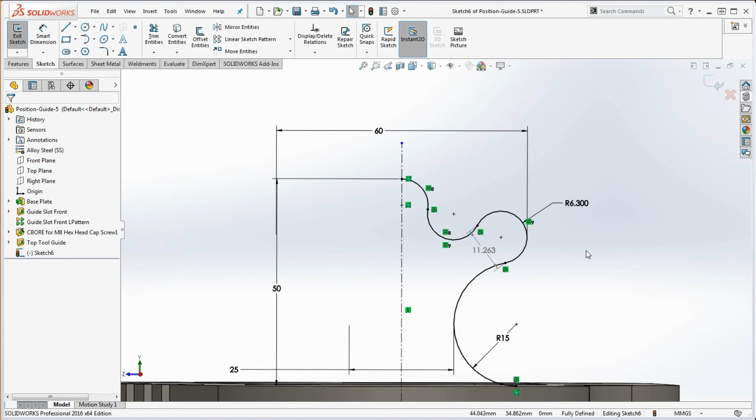Go ahead and suppress this dimension up here, right-click on it, make it driven. And then bring this down a little bit, or bring that out a little bit. Redefine this by making that driving. And then type in the value on that. So that's what it's not supposed to be. This is what it should be. We're going to make that driven.

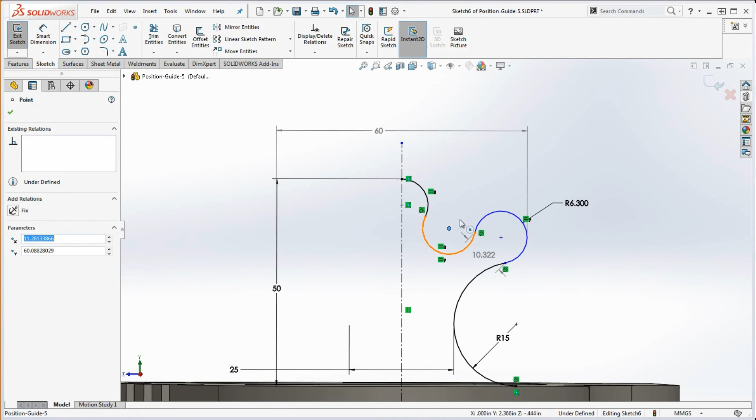Again, move this up. Take the center point of that up a little bit. And move that a little bit. So yeah, we're going to move that up a little bit. Right click on that. We're going to make that driving. And then click on the value in here and make that 60. That's the value you should get. Okay, that was kind of winded, but let's go ahead and complete this.

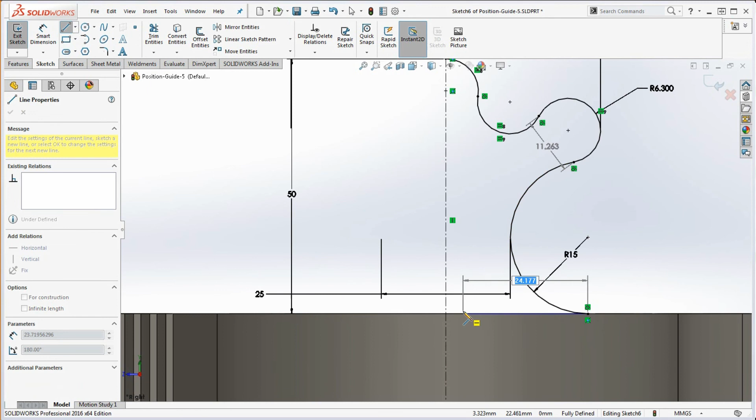Let's go normal to the screen. What we need to do is we need to put in a horizontal line down here to the center point. Make sure you go to the center of that, not to that midpoint. Here's kind of a midpoint relationship in that edge, but if we click on that, that'll get it to the center. Let's go ahead and complete our geometry, make it enclosed. Let's go ahead and put a vertical line from top to bottom. And now, let's go to Features, Revolve Boss Base.

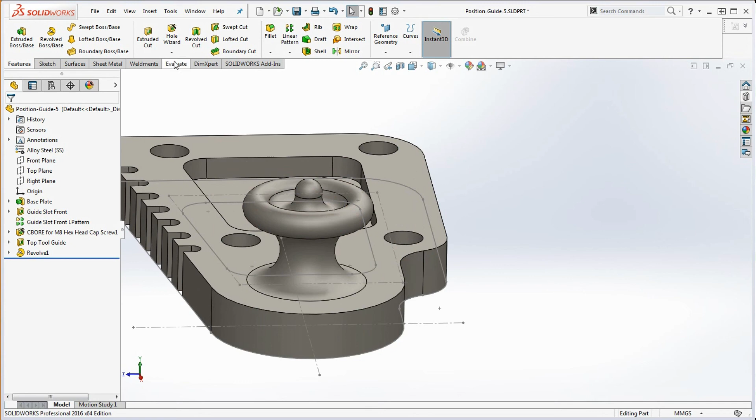Let's check our mass properties. So that's the way it should be. Again, check that dimension in there when you put this together. And if we go to the mass properties in here, evaluate mass properties, we want to make sure we get the appropriate value. So let's go ahead and bring up our drawing and take a look at this. Let's bring this down a little bit, make it a little bit more readable, and bring that back in.

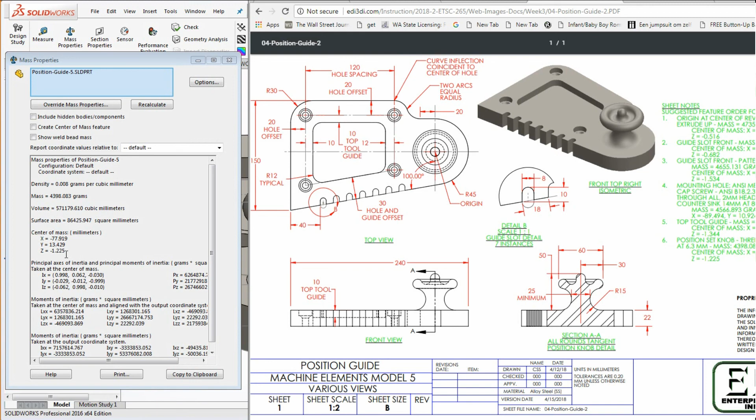Okay, so for the mass properties, we're looking at 4398.083, which is what we have over here. X is at a negative 77.919. Y is 13.429, which we have. Z is going to be a negative 1.225, which we have. So that's how you put together the position guide.

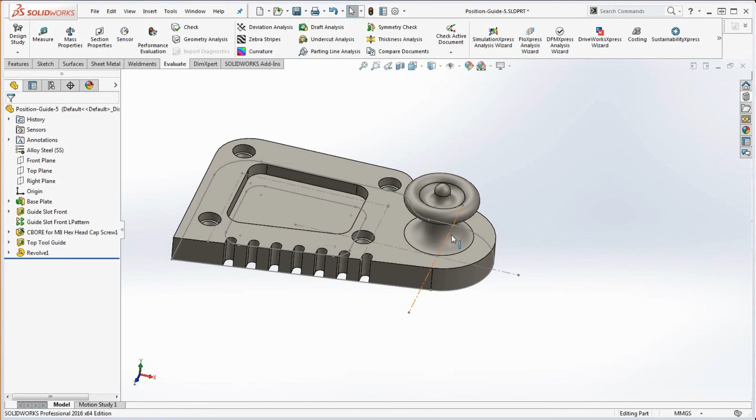So we talked about how to put it together with a base feature, and here we put a lot of sketches in that base feature, which we borrowed for various different features that followed, including the hole wizard hole and that top tool guide that we put in. We have a revolve feature back here, which is the last item we put in here. We sketched that on the right plane, but we could have sketched it on the front plane too, with the appropriate dimensions that we see over here in the drawing.

And we also demonstrated in here how the same geometry could be resolved, fully defined, in two different ways. So you have to be careful with that. But ultimately we end up getting this part. It gets fully defined with our correct mass properties. And I think we're done.